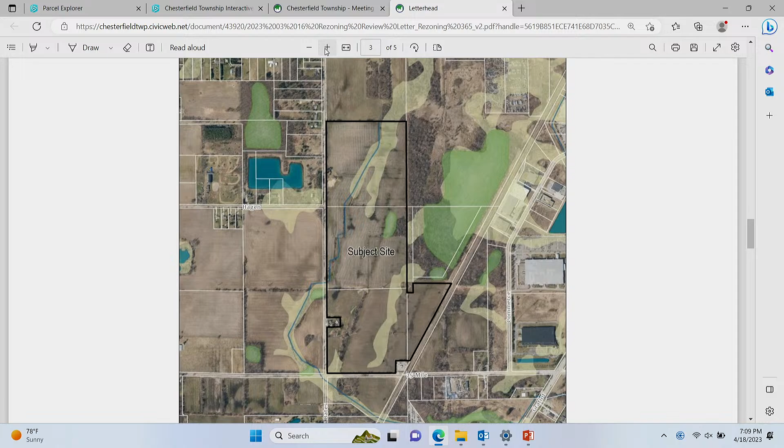Thanks. Thank you and good evening. My name's Larry Scott. I'm an attorney at O'Reilly Rancilio, 12900 Hall Road, Suite 350 in Sterling Heights.

I'm here tonight on behalf of Messrs. Lewicki, father and son, who sit here with me, and the companies that they own, including a company by the name of Althea Holdings. Althea Holdings owns two 40-acre parcels, and it's in the process of purchasing 5 adjoining parcels at the northeast intersection of 25 Mile and Bates.

Like I said, we own 2. We're in the process of purchasing three others: a 10-acre parcel, a nearly 41-acre parcel, and one 22-plus acre wooded wetland parcel that is not proposed for the rezoning. The 4 parcels that are the subject of the rezoning total approximately 131 acres.

All of the parcels are currently zoned M1 industrial under the Chesterfield zoning ordinance. This proposed rezoning seeks to rezone these 4 parcels from M1 to M2 general manufacturing under the Chesterfield zoning ordinance. There were meetings here with the township, and the rezoning to M2 was initiated pursuant to discussions with township officials, given what the proposed use was.

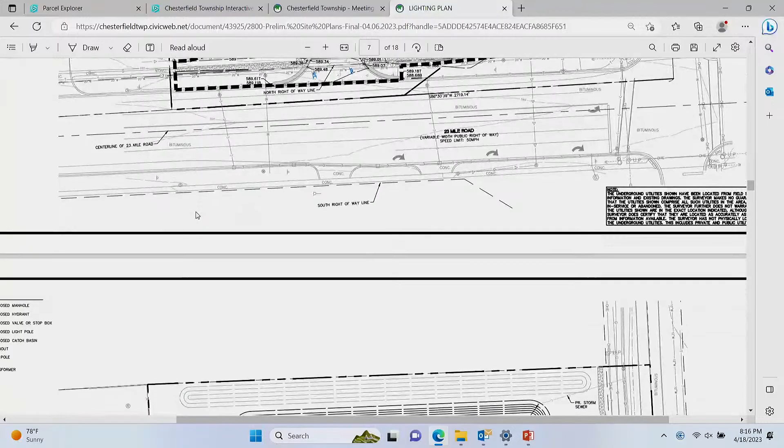Here we can see that originally the gas pump setback A4 was not compliant. I've corrected that to now be compliant. In terms of site standards, the building materials calculations have been provided on the newest set of drawings, but they are not compliant. The applicant will need to revise those, but may wish to speak with you about that tonight.

Let's see, this is page 6 of my review, discusses the berms. The applicant confirmed that the slope will be 4:1 and pine straw mulch will be used on the side slopes. The Planning Commission may wish to discuss if that's consistent with the proposed character of the building. All other landscaping items have been met, including a clear vision triangle on the plans and having the correct number of parking lot trees. In terms of lighting, it's all set as well.

Everything's been updated in terms of photometrics to show compliance. Regarding parking, I'm on page 8, so parking, we ended up using the ratio of 1 space per 100 square foot of retail floor area, which required them to provide 18 parking spaces just for the floor area. They confirmed that they'll have no more than 4 employees working, so they needed a total of 22 spaces. They've provided 25, one of which is ADA compliant. So their parking is now compliant, and again, the landscaping was updated in accordance with the new required parking.

Bollards are, we did receive some information about the bollards that are proposed. They will be 3-foot tall black bollards in front of the entrance, and the one in front of the ADA parking space will have the ADA sign attached. The bollard placement was not noted on the plans, or at least I didn't see it, in my quick cursory review of these.

So we'll just want to confirm, or have the applicant confirm, that they're placed at least 2 feet from the face of the curb and 3.5 feet from the wall.

Bicycle parking was also moved. It was originally over on the northwest side of the building, and it's now been moved over to the east side of the site, in the parking island that sticks out along Sass Road. They're providing a 3-foot tall rack with a wave design, essentially 2 inverted U's, which is what's required from your ordinance. The Planning Commission may wish to discuss the location of this and if it's worth splitting the bike rack so that it's on both sides of the site.

Almost finally, page 11 of the review talks about internal circulation and waste management. I will note the applicant has added internal sidewalks, both from 23 Mile Road and Sass Road, that connect the bicycle parking and the sidewalks to the main entrance.

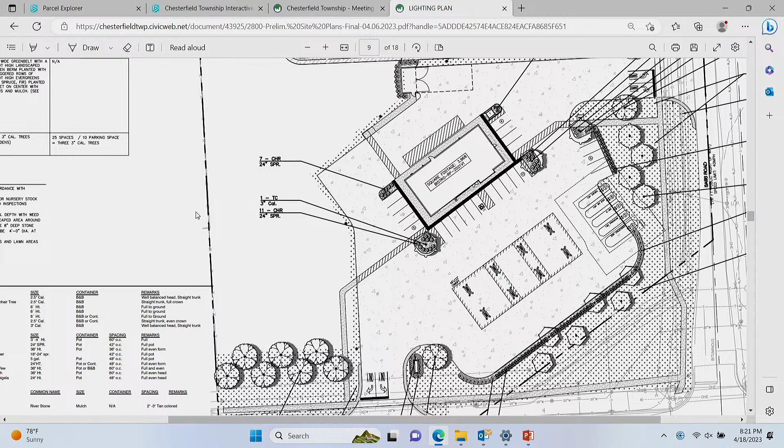Mr. Chairperson and Commissioners, my name is Dave Lemons. I represent Kum & Go Convenience Stores. Before we jump into some of the site plan things, I would like to introduce who Kum & Go is as an organization so that you know who's operating a store in your community prior to having conversation about the specifics of this site.

And so, I'll make this brief, I promise. We started in 1959 in central Iowa. We're based there. We're owned and operated by the Krause family. Important part about that is that we operate all of our stores. We don't franchise anything out. Everything is operated by us as a corporation.

We're about 400 stores currently, in 13 states. If you think about Minnesota through Iowa down to Arkansas, North Dakota, South Dakota, down through Nebraska into Oklahoma, Colorado, Wyoming. We're also in Montana, moving into Salt Lake City, as well as Idaho, but most importantly, we're moving into Michigan. We've been working in the western side of the state for the last couple years, and we have a number of sites that have opened there and are in progress of approval over the course of the next couple years.

So this would be, if we make this site work, our very first site in the Detroit MSA. I've been on the ground here for about 6-7 months working on that in this community.

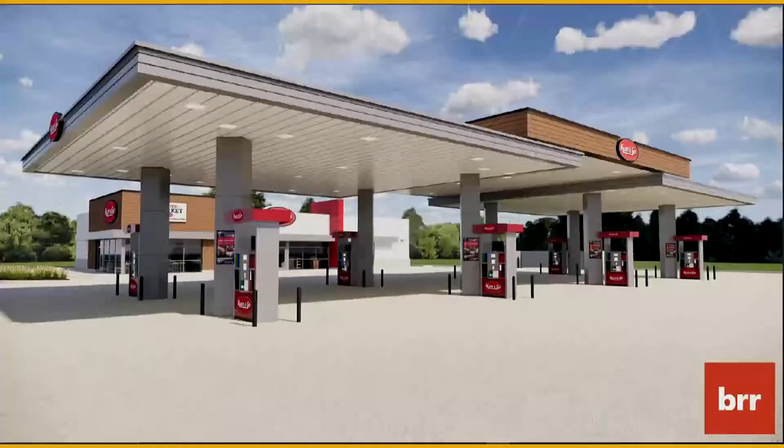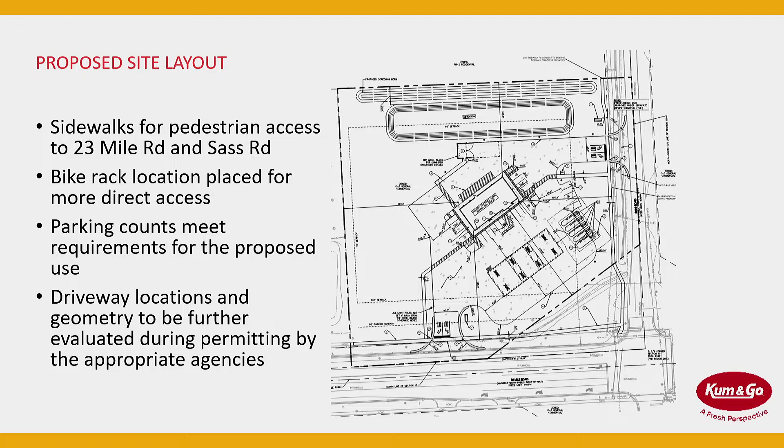The berm was brought up. In general, it's matching township requirements, also following the character of the development to the north. We have reviewed those plans and been in discussion with them, so a berm of the appropriate height with landscaping is what we are presenting here.

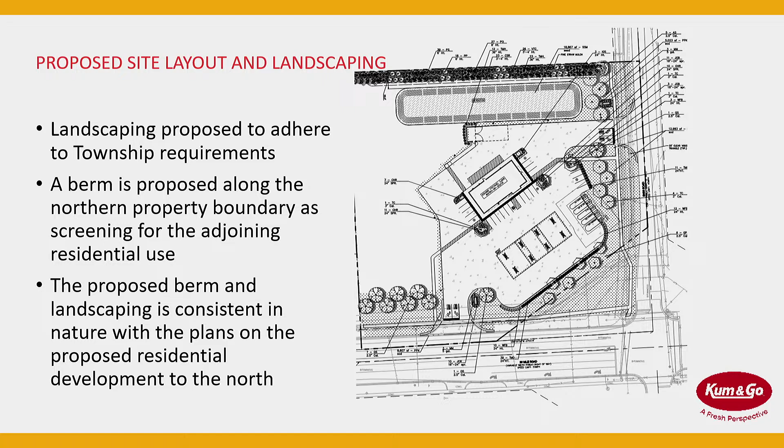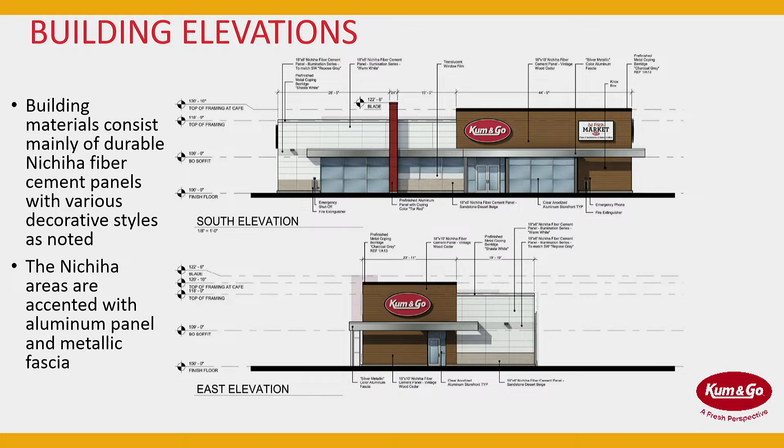So to touch on what I just mentioned, the proposed building materials are durable and decorative. I know brick is a typical request, but we believe these will also meet the intent and the standards being requested.

And then, because it was brought up as part of the review from various agencies, we have some slides about traffic impact, and we have Julie, our traffic consultant from Fleis and Vandenbrink, to comment on some of that. Thanks, Jamie. Julie Kroll, Fleis and Vandenbrink.

We did the crash analysis and the traffic impact study that was in your packets. I know this is really hard to read, I can barely read it myself, but we did the traffic impact study in accordance with MDOT criteria. It is on an MDOT facility.

Some key findings from the study: the 23 Mile and Sass Road intersection currently operates at existing level of service B during the AM and PM peak hours. B is actually a really good level of service. For us, anything D or better is considered acceptable, so when we see E's or F's, that's when we look at mitigating. Existing operations were B during the AM and PM. When we add the site-generated traffic, we add some additional delay, but we're really adding less than 5 seconds of delay at that intersection due to the increased traffic volumes.

I'll talk a little bit about traffic volumes here in a second, but for the site driveways, we looked at the site locations. The site is not very big, so the driveways were placed as far away from that intersection as they could possibly get given the site constraints. One issue we looked at was whether the queues from that intersection would impact the site drives, and they do not extend past any of those site drives, so we felt comfortable with the plan presented.

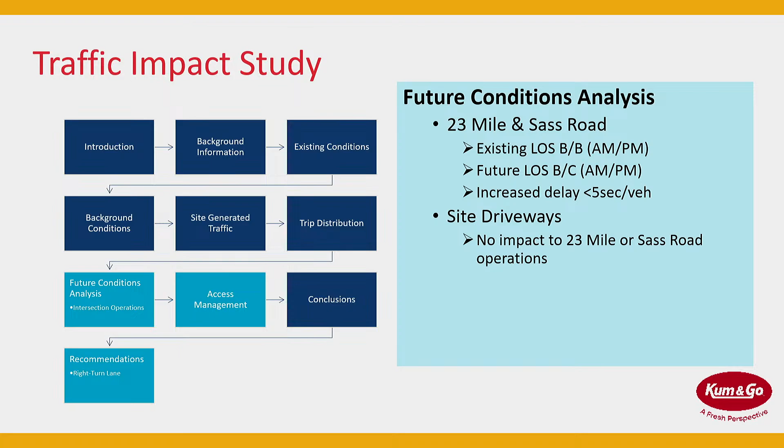The access management just speaks to what I mentioned about the site driveway locations placed far from the intersection. The north driveway will not be impacted by the intersection, and there wasn't adequate frontage on 23 Mile to meet the MDOT criteria. They literally didn't have enough property frontage to meet the MDOT criteria for driveway spacing, so MDOT will consider that as part of their review. Ultimately, the recommendation for this site was to provide a right turn lane at the site driveway on 23 Mile, in accordance with MDOT requirements. There's already an existing center left turn lane, and it didn't meet any of the threshold criteria for turn lanes on Sass Road, primarily because the volumes are too low on that road to require any sort of turning treatment.

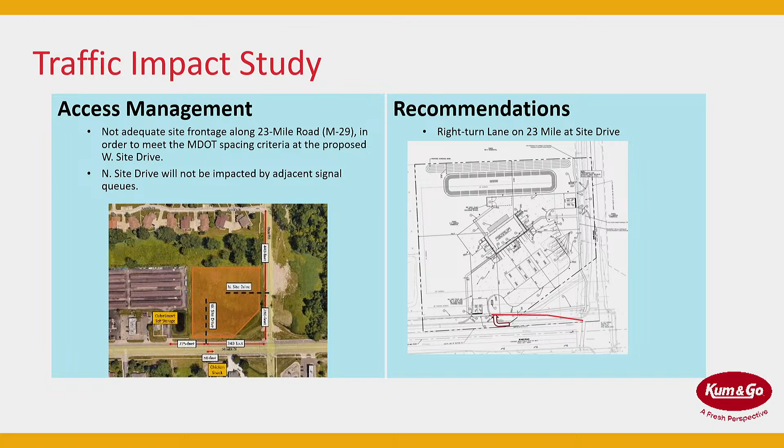One thing I wanted to mention about this particular site: with gas stations, a lot of the trips are not actually new trips to the network. They're trips of people already on the road who stop into the gas station either on their way home from work to get food or gas or both, or people on their way to work doing the same. So with this type of user, pass-by trips on average are 75% of the trips generated by this site, meaning people already passing by the road. We're not adding new trips to the network - only 25% of new trips are added because of the gas station, and those would be people leaving their house, going to this convenience store, picking up milk, gas, etc., and then heading back home. So the new trips added is far, far less with this type of user.

One thing that was brought up was the crash data. So we did a separate crash analysis to do a bit of a deep dive to see what was happening. Over the past five years, data showed 7.4 crashes per year at the 23 Mile and Sass Road intersection.

The highest percentage of crashes were rear-end and head-on left turns, which is super typical at a signalized intersection. Rear-end crashes usually occur when a car stops short or the driver isn't paying attention—nowadays that's usually someone on their device rear-ending someone at a signalized intersection.

Crashes with injury: there were no fatalities and no Type A injuries. Type A is an incapacitating injury where someone is taken away in an ambulance. Type B is someone treated at the scene—those, I believe, were pedestrian-related crashes.

And then there were 14 Type C crashes, which were bruises. There were no driveway-related crashes identified in the crash patterns. We pulled all the crashes from the area, and there was nothing related to any of the driveways in this particular area.

What we did recommend from the crash analysis was, because we saw some red light running here, we recommend reviewing the yellow and all-red clearance times, extending them to reduce the potential for red light running crashes.

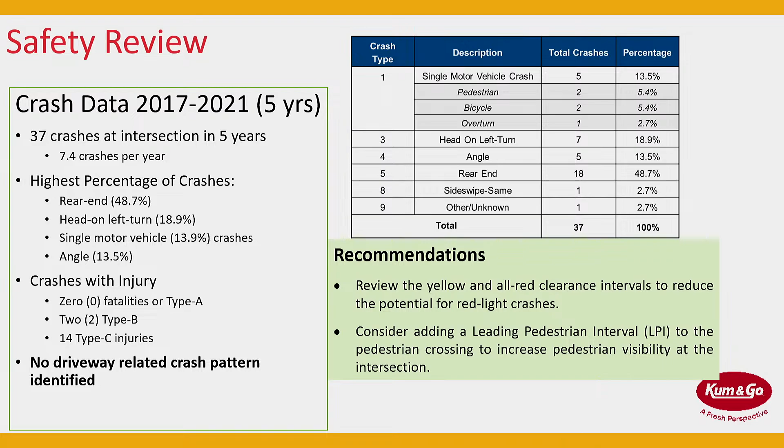We also recommend considering leading pedestrian intervals at the intersection, since there were some pedestrian crashes. I'm not sure how familiar the commission is with these, but they're a crash reduction mitigation measure used at signalized intersections—giving pedestrians a head start into the crosswalk before the light turns green, which increases visibility for turning vehicles to see pedestrians. We've implemented them in several communities, and MDOT is now implementing them statewide.

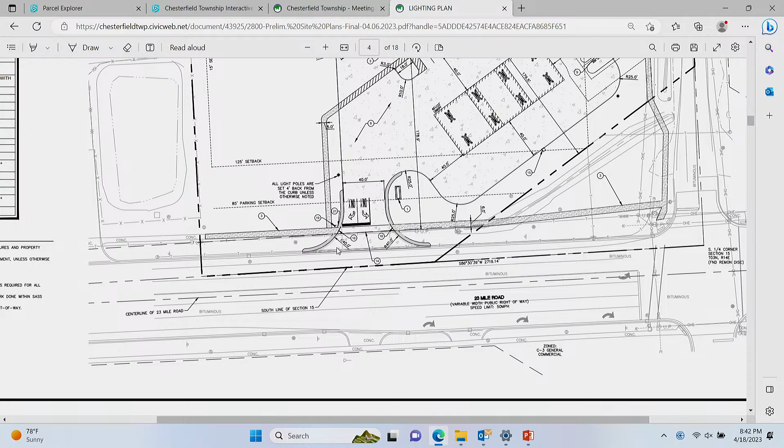We do want to provide some flexibility should the remainder of the parcel want to be developed. That's not part of this plan or any current knowledge of that, but that's why the drive would be placed where it is, for access to the current development, and then to be centrally located should there be further development on that remaining area.

But that is your parcel, correct? Correct. So further development from you in the future? More likely to be sold and developed by another party. Okay, thank you. Mr. Klinowski?

On your exit on 23 Mile Road, I noticed one of the suggestions by the traffic people was that you allow only an exit to the westerly turn, or right turn, and not have a left turn in that area. And the reason is that there'll be a lot of conflict there with the corner and that lane.

Would that be something you would consider, because there is a potential conflict in turnings there? I mean, our preference is to maintain as full access as we can. I guess we're willing to listen and discuss what additional concerns might be on that, but our current request is full access on that area.

Okay, thank you. We need full access as shown, so. Because what he's talking about, and that was a good point, that was one of my points I forgot. Turn your mic on. Full access, you do have full access. You have everybody be able to come in from two different avenues, both directions, east, west, north, south.

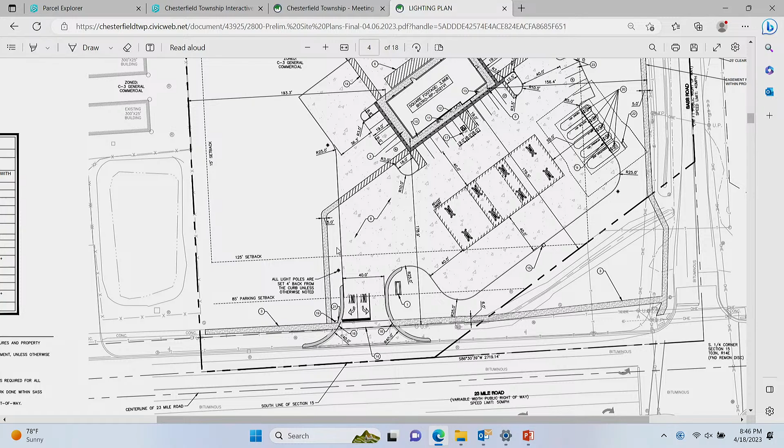Number one is building materials. Our township, our ordinance requires brick or better on the front of the building. You've proposed a cement board panel, some metal finish panels. What can we do? Can we get some brick on that building? Possibly brick on the columns that hold up the canopy, as well as, I'd like to see some brick on this building.

Is this your building standard? Have you run into this before in other cities or townships where brick is required, and what can you offer us?

Yeah, so this is a fairly typical standard for Kum & Go, and they kind of pride themselves in having a high standard, trying to offer a very aesthetically pleasing building with durable materials. Understanding the ordinance, I think it says something to the effect that exterior surface needs to be face brick or similar durable material. So we are putting forth the thought that this is certainly a similar durable material.

It's a cement material. It is chosen for a reason for Kum & Go, in that it's durable, it holds up, it's actually really good for this type of climate, even compared to brick. I'm sure you've seen this on many retail buildings, because this is a product that is used a lot nowadays on retail buildings. But you can't tell the difference between that and brick, if that was a brick pattern. So, we would be open to the conversation of maybe introducing some more brick pattern type elements here.

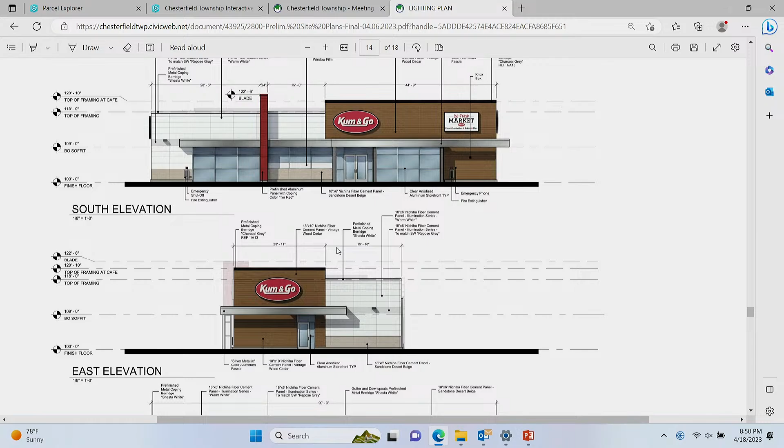Second thing I have is the EV chargers. I think you put them over in the northeast corner of the parking lot, is that correct? Yeah, that's where we moved them to be a little bit more prominent on the site. Is that where the gas tanks, or fuel tanks, are on the ground? Will the fuel truck be there blocking those spots when he's filling up the fuel tanks? No, the fuel truck will be south, directly adjacent to the curb line—I don't have a pointer, so I apologize. The EV chargers are in those parking spaces north of there, so there should not be a conflict.

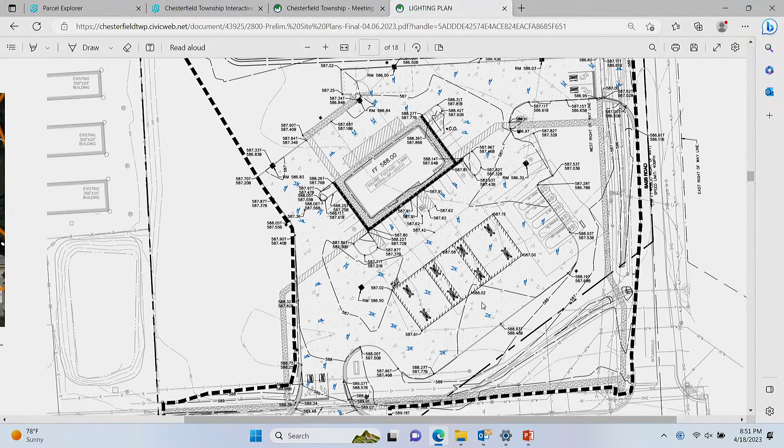I don't have a problem with the berm. To Mr. Carr's point, the 10 by 20 parking spot is more desirable for chargers. We don't have an issue with the 10 by 20; if that can be a condition, that would be acceptable to us.

The bike rack, the single bike rack—I don't have a problem with just one. If somebody's going to be exercising and riding their bike to the store, they can walk to the door from one side of the building to the other. So I don't have a problem with that.

I'd also like to point out that you're showing signs on your site plan drawing. There's no sign review this evening, so don't plan on putting signs up without sign permits and sign review. Yep, thank you, we agree with that. It's more for informational purposes, and we understand a different permit and review would have to take place for that. That's it, Mr. Chairman.

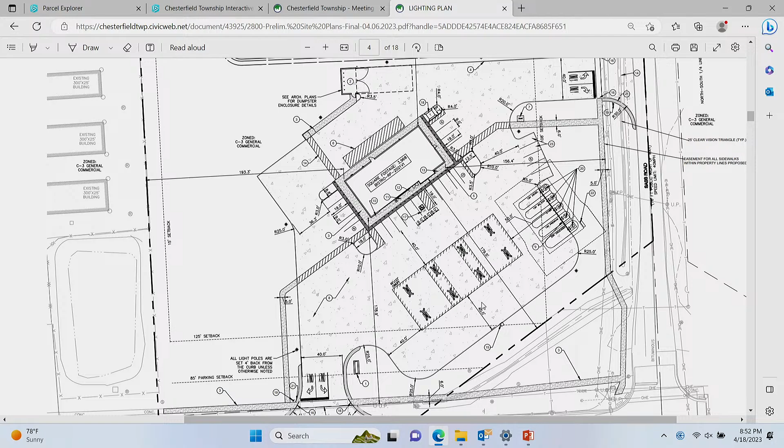Thank you. I did look at the landscaping plan, and I think it's one of the better ones we've seen. It's really nice, got a good assortment of trees and shrubs—most people just add perennials and don't care about the good stuff, but you guys did a good job. Thank you.

Any other questions by the board? If not, would anybody in the audience like to speak? Oh, no. Gary, we won't go home.

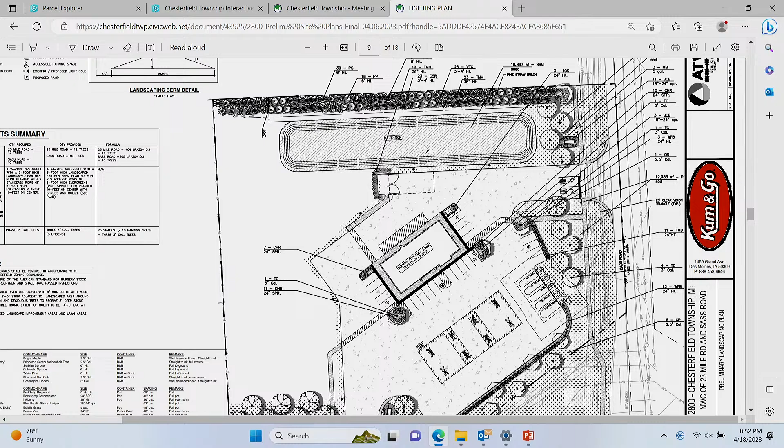Gary Yanonelli, 52624 Laurel Oak Lane, Chesterfield. In one of the pictures that was shown, it showed gas at 99.9 cents per gallon. So my question is, when you open up, are you going to sell it at 99.9 cents? That's an old picture. We'll take it under advisement. Okay, that's a good answer.

Then my other question is, since it's modern America and the government's pushing to have more electric cars, can you have the charging station at the same place where you have the gas pump? Or because of the electricity, is that too big of a hazard?

Well, the car has to charge for an extended period of time, which blocks up that particular space during that time frame. So it becomes a half an hour or longer charge.

So they would typically be separated. I cannot scientifically or technically answer the question. I can. No, you cannot. You can't? I'm a master electrician, so I understand all of that. Well, because you're going to need more charging stations at these newer facilities.

The other comment too was with reference to the acceleration lane when you're going westbound. If you talk to the people at MDOT, try to start it closer to Sass so you don't have the problem like up by 23 and I-94, where that one gas station has a taper lane.

And then all of a sudden it ends for like 10 feet, and then you go into the gas station and people have to swing out and then back in. And then there's a couple of places along 23 where they do have a left turn light arrow, like where R.C. Schmidt's technical park is.